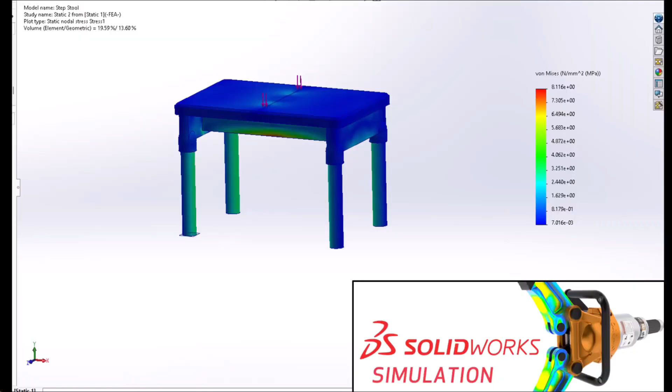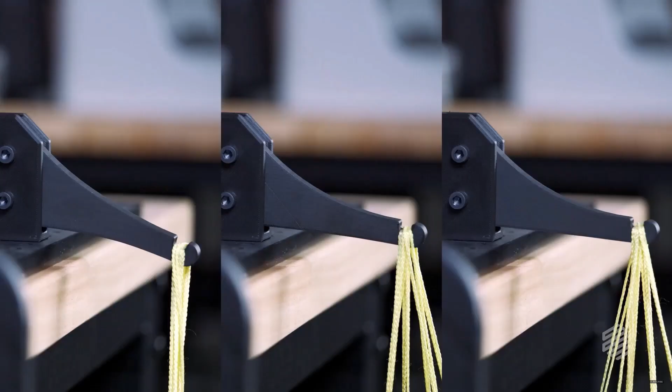Before we go and assemble everything, I wanted to discuss some simulation work that was done on the stool. Markforged simulation is a remarkably powerful tool because it can quickly and easily simulate 3D printed composite parts. Before Markforged simulation, setting the scenario up required a nonlinear solver, which is very technically demanding, very time-consuming, and very expensive. Only downside is that Markforged simulation cannot simulate 3D printed assemblies.

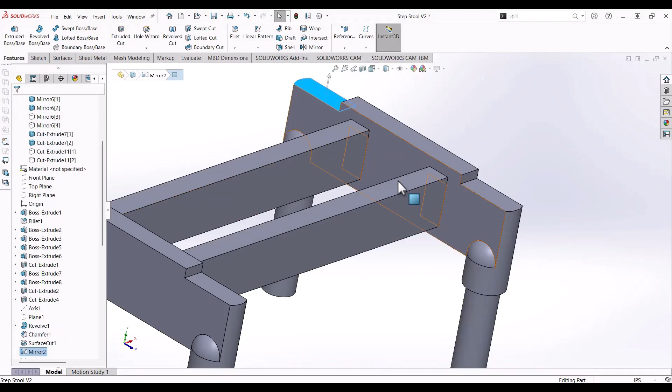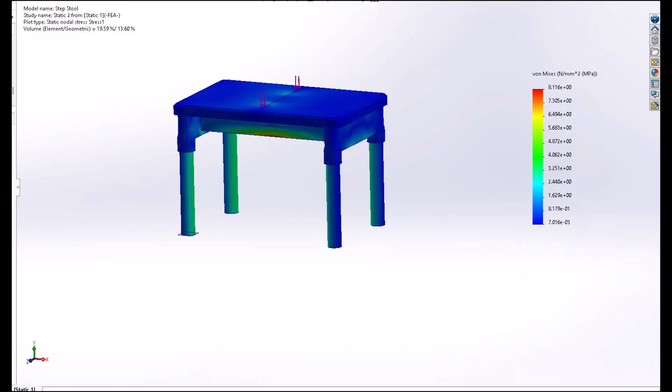So, in order to collect force data on the different faces, I turned to SOLIDWORKS simulation, assuming all parts are made from solid ABS plastic, since that's a profile already pre-built in. After removing clearances and establishing contact detection, a 300-pound load was directed into the stool as defined by this elliptical face. Once the simulation completed, we could see how that 300-pound load is distributed across the major load-bearing faces beneath the step. Since these values will remain proportional between materials and weights, I can use this data to simulate that same load in Markforged simulation for a more accurate representation.

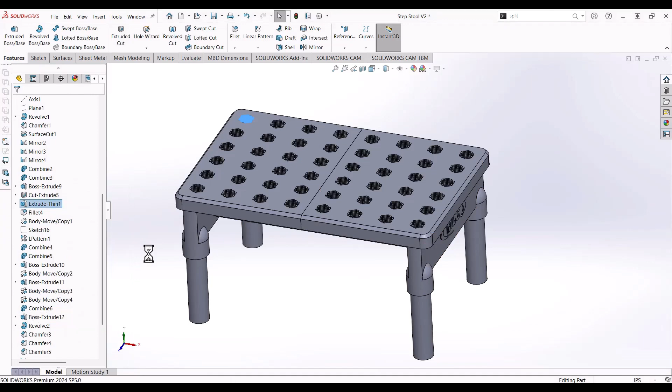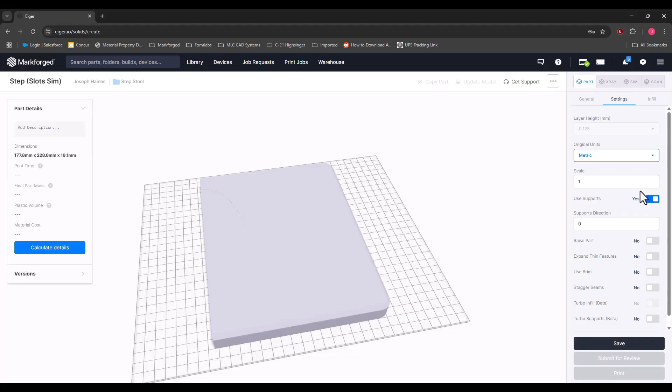First, I had to make some modifications to my SOLIDWORKS file. I suppressed the tread pattern for simplicity, and then added that same ellipse to the steps, only this time slightly extruding it into the step faces so that I have a selectable region in the simulator. I did the same for the cross beams and to the underside of the steps. I exported these updated files and imported them into Eiger. After recreating the print orientation, the print settings, and fiber layout, which required some slight adjustment to situate the fiber beneath the ellipse, I clicked the Sim tab.

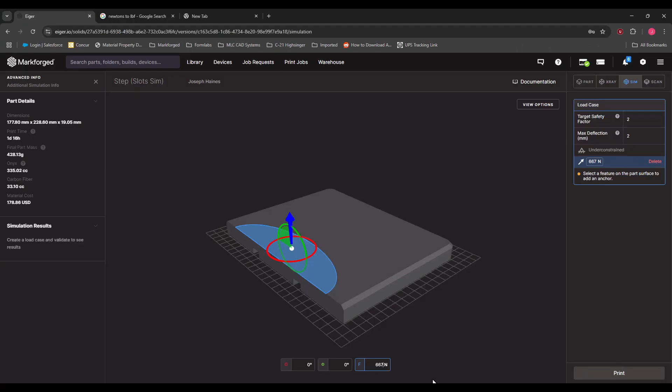From here, I chose the elliptical face as the loading face, applying half of the 300-pound load to it, which is 667.25 newtons. I then selected the slightly engraved faces as my anchors and left the safety factor and maximum deflection at their defaults. Next step was to validate. After a few minutes, here are our results. Looks like our fiber routing strategy for the steps is plenty strong.

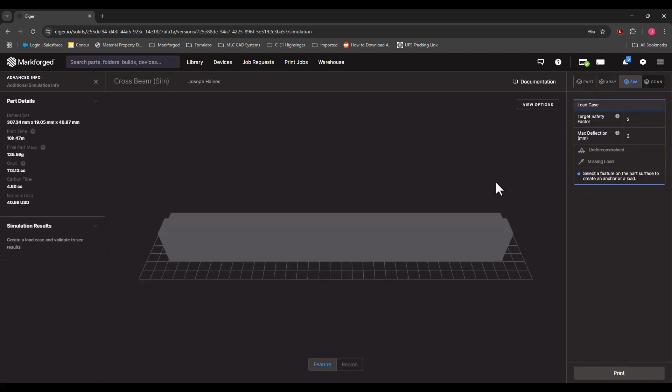For the cross beams, I recreated the printed setup and jumped into the simulator. From SOLIDWORKS, there is 131 pounds of force applied to this face. That's 582.7 newtons. Then I chose my anchor faces and ran the validation case. The deflection is extremely minimal, and the minimum safety factor is right at 2. Although we could optimize this, I can't imagine a 600-pound person standing on the stool, so we'll ignore it.

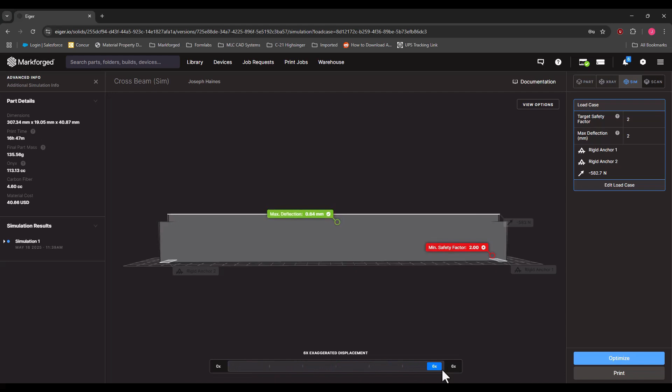And just so you know, the optimize feature will adjust print and fiber settings in different permutations, simulate each one, and then feed us the results on which permutations would meet our safety factor and deflection parameters. It's pretty wild what this thing can do.

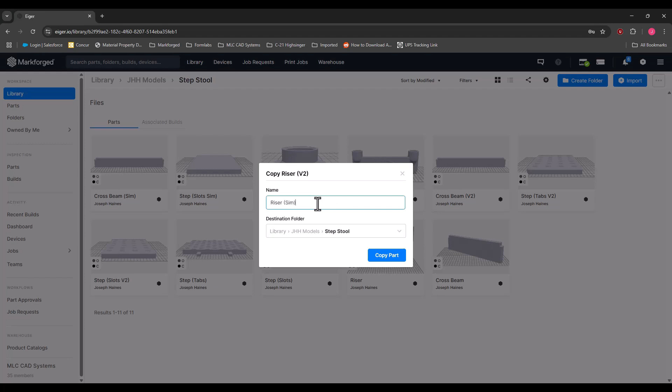Lastly, time to test the riser. Since we didn't have to modify this part in SOLIDWORKS for simulating, we can simply copy this file and rename it. After double checking that the X-ray view remained the same, I opened up Markforged simulation. I selected the anchor faces and then calculated, in newtons, the pound force values from SOLIDWORKS for the 4 loaded faces. After saving the load case, I ran the simulation. Nice, all green marks. Looks like we're ready to go.

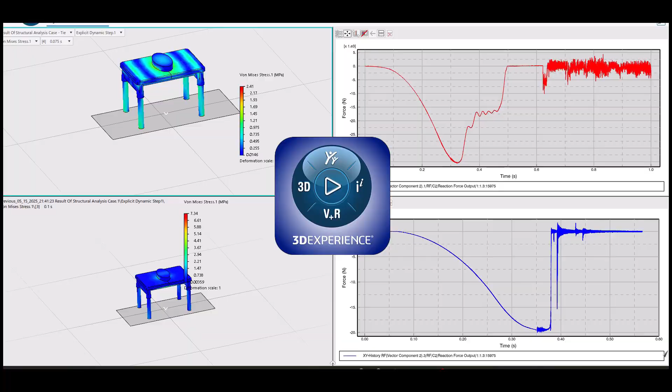And for fun, my coworker Jon Duffin ran a cloud simulation in the 3D Experience platform to test the failure point, again, assuming ABS plastic. Since the ABS profile does not have data for plastic deformation, he used ChatGPT to hunt down values like Poisson's ratio and the constants needed for the Johnson-Cook model. Artificial intelligence is growing exponentially. I genuinely cannot believe how insanely powerful it is.

Once Jon entered all the values the Simulia Abaqus solver needed, he started the simulation. He ran 2 different versions. The first case assumed very minimal friction interactions, like in the SOLIDWORKS simulation case. And if I were to show someone that animation prior to having them try standing on the stool, I'm pretty sure they're going to run away very quickly. Looks like a grenade went off.

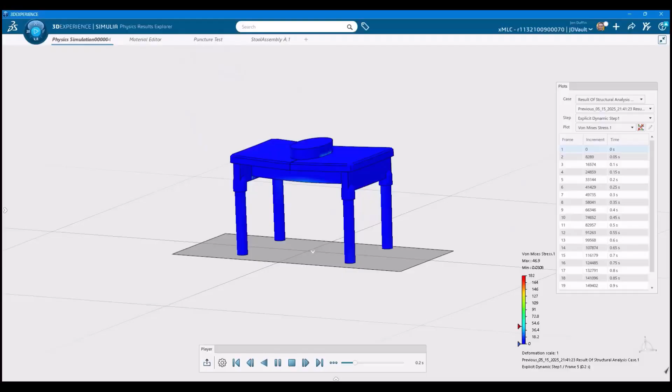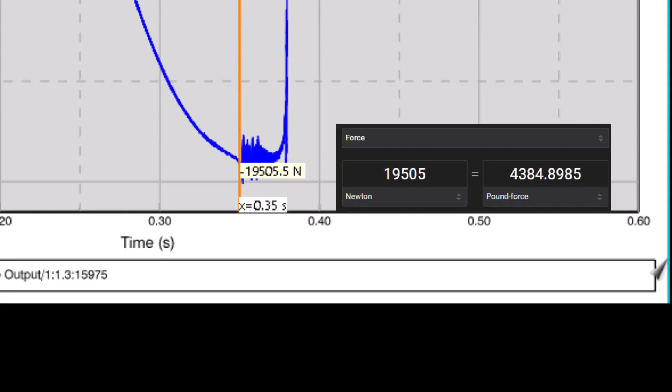The second case Jon ran assumed an indestructible bond between the different pieces. This animation kind of looks like one of those Boston Dynamics robot dogs powering down. And the forces required to initiate plastic deformation in case 1 is 4,385 pounds of force, and in case 2, it's 7,960 pounds of force.